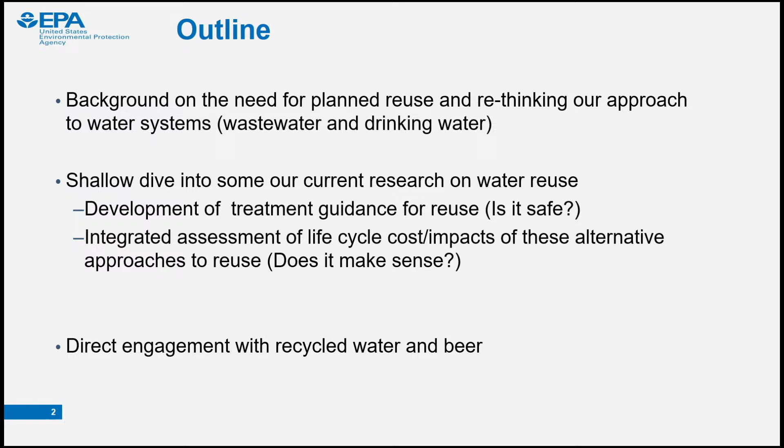And then the final thing we want to do is a little bit of direct engagement with you on the idea of how do you communicate about the safety of water. We can tell you the science behind it, but sometimes it's just best to drink the water that you produce to kind of verify it.

In this case, we're not going to ask you to drink recycled water. We're going to ask you, if you're interested, to drink beer that was brewed from recycled water. We have that from one of the companies doing this—they're based in San Francisco. So we'll have a little beer tasting at the end.

So I'm going to start off by justifying why we need to think about changing our water systems. One of the big drivers is our climate changing dramatically. The data here is from the fourth National Climate Assessment—a little dated, from 2017. But even back then, 6-7 years ago, the projections were that we're going to have chronic, long-duration droughts. And that's already occurring, particularly out west. We know that's a problem. That puts stress on our water systems because there's less clean water available to supply the system.

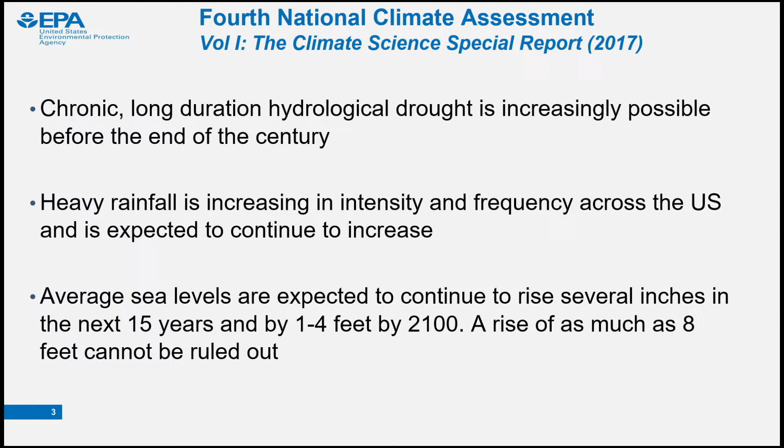The second thing is that not only are we having less water, we're also having more water in heavy rainfall events, including back east and throughout. That also puts stress on our water systems because part of our water systems includes wastewater collection and stormwater collection. When we have those big events, we have combined sewer overflows—we have them here in Cincinnati and other places. That stormwater overwhelms the collection system, and raw sewage is actually discharged to the environment. That's the combined sewer overflow, another stress on our water systems.

And that same climate report talked about water, and I know this is kind of wordy, but the problem with water is—I bring my wife so she can heckle me. Bring it on. She's not wrong.

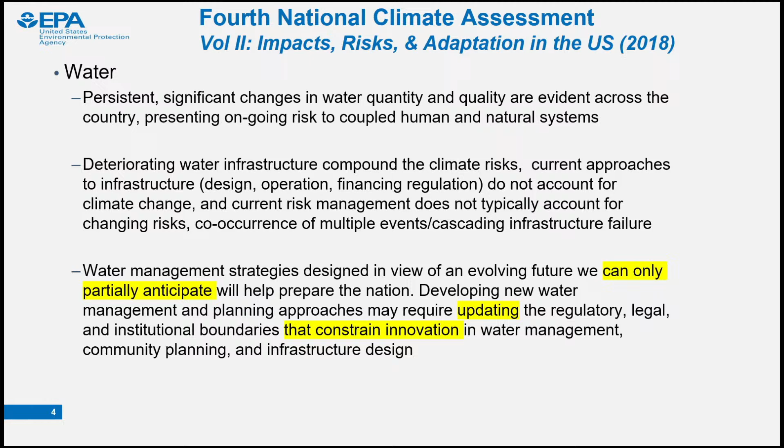I just leave you with this last slide on climate change, if climate change bothers some people. This is from the 2022 report, and basically if you read that report, the tone of it is like: we've been talking about this for about a decade now, telling you it's an issue, it's growing, and all the data suggests the warming is faster than we thought, the sea level rise is faster than the original models projected. This is an issue, and what this says is that we're already getting past the point of just living with it. We're going to have to adapt and try to mitigate this. It's really going to be a challenging next few decades simply because of that.

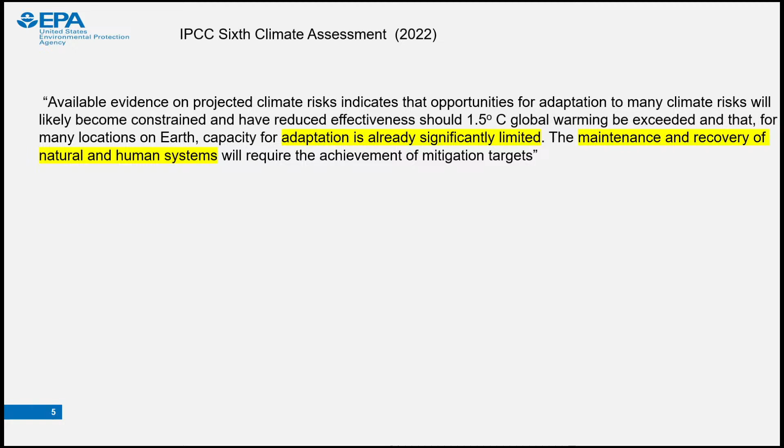So for those of you, I don't mean to be doom and gloom. When I talk to my kids, I try not to be doom and gloom. And some people don't like climate change, okay, but let's put this all aside. Assume that the future climate was going to be the same. There'd still be a strong argument that we need to change our water systems.

And that kind of gets into this question of why do we have the systems that we have now. Why do we have these large linear networks where we collect water from some source, bring it to a city, drink it, flush your toilet, and the waste goes somewhere, hopefully downstream of the drinking water plant, and that's our system. That was a great solution for the 19th century, 20th century. It's not so good anymore, and the reason for that is that there's too many of us. There is no downstream. Everybody is downstream at this point, right?

And we see that with some of the growing accumulation of common contaminants like PFAS, perfluorinated compounds, and microplastics. So this linear perception that we have a resource, we can extract it, use it, and dispose of it, and the environment will clean it up, really doesn't work because there's too many of us. There's too much stress on the water systems.

We know that doesn't work. But why do we have that system? Well, because first, we felt like we had enough — there was plenty of water, plenty of resources, and that worked. And it did. What it solved was public health issues with contamination from fecal sources and disease spread, right?

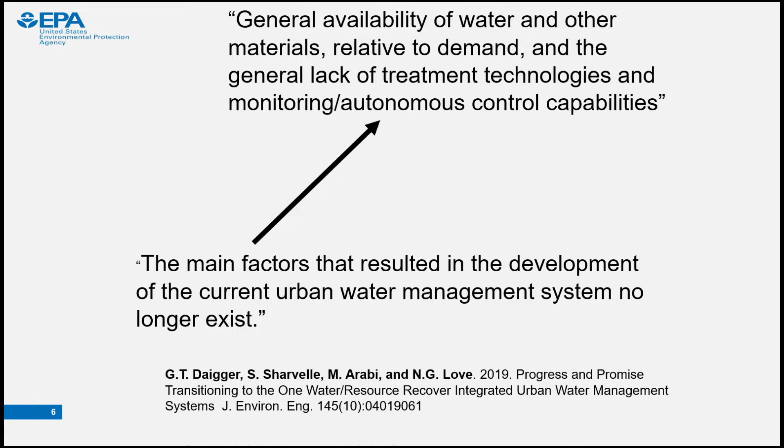So that was good, a great solution for that time, but not in the world we live in now. The good side of this, though, is that the other reason we have those systems is that we really couldn't do much more than that — we didn't understand the fundamentals of the biology going on. We have so much more advanced technology now in engineering and biological engineering, designing and monitoring systems, microelectronics, and other capabilities that let us do so much more. So the take-home message from this slide is that we need to do something different, and thank goodness we have the capability to do that.

So we can move forward into a new future. People talk about this transformation into a new system, where historically you've got a water system that's just producing water, meeting regulatory standards, plumbing up the planned city, and it's all very centralized. And I'm going to charge people based on the volume of water they use.

That's historical, but moving forward into the future, we're really starting to think about water as part of the circular economy, where we're using the water and the other resources in wastewater. We're not going to talk a lot about this, but there are nutrients we can use in the wastewater, there's energy in that wastewater, there's all kinds of things. This gets back to the roots — when you're in space, there is no waste, right? All the compounds you produce are no longer waste, they are resources. That's true for life on Earth too, and that's really the direction our water systems are moving.

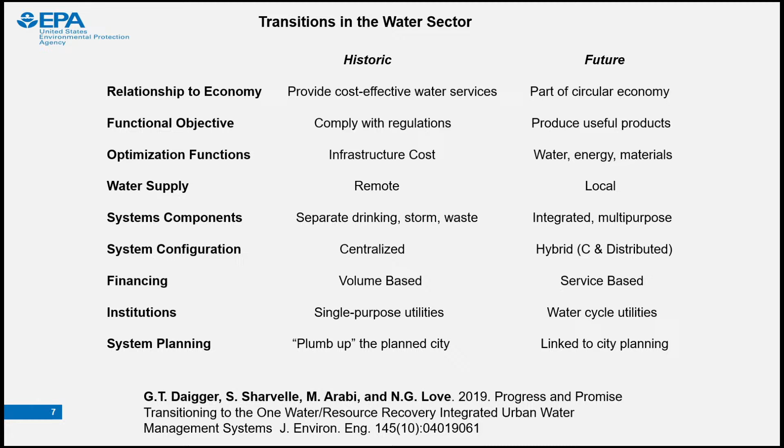That is occurring, particularly out west. In California, most major cities are moving in that direction. This is good, but I don't actually like this linear, monolithic path, as if it's the only way. We're just replacing one form of centralized water system with another. We're reusing the water, but still thinking in this linear approach—very monolithic, as if this is the only way to do it from a centralized perspective.

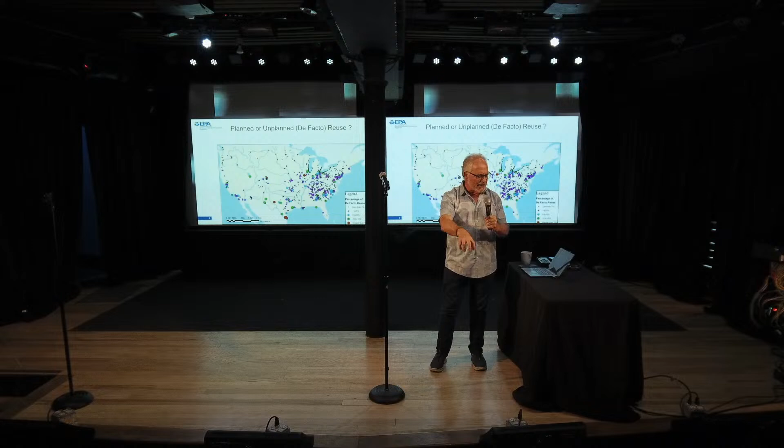One point I want to get across: when you think about water reuse, this is all planned reuse. You need to compare it to what we're doing now. What's the base case right now? The base case is we already do a lot of reuse—all water is reused. You all had 8th grade science class where you learned about the water cycle, and all water is recycled.

In this case, we know that a lot of wastewater ends up in drinking water. We just put it in an environmental buffer for a while, like the Ohio River, and it flows down, and then someone takes it out of the Ohio River, but it still contains lots of wastewater. So this map shows dots representing the percentage fraction of drinking water intake composed of wastewater discharges. The numbers range from 0 up to 15% or more of the total volume of drinking water you pull up being treated wastewater—but it's still wastewater.

So it's kind of de facto or unplanned reuse, and that is occurring—you can't see the map that clearly, but in Cincinnati we're at about 5 to 10% of our drinking water being wastewater discharge. Keep that in mind: we already are doing water reuse. Why don't we do it smartly? Why don't we do it in a planned way now that we have these additional tools?

One of these twisted paths in the evolutionary tree—one solution to water reuse is thinking about it in a more decentralized way. If you look at a building, there are two ways to view it from a water perspective. This gets back to the idea that there isn't waste, there are resources. You can think of all the water generated in a building as wastewater you have to deal with—a problem. Or you can flip it and call the problem your solution: those are all locally available water sources you could treat and reuse, reducing reliance on transporting drinking water to the site, particularly to flush your toilets. Why do we use potable water to flush toilets?

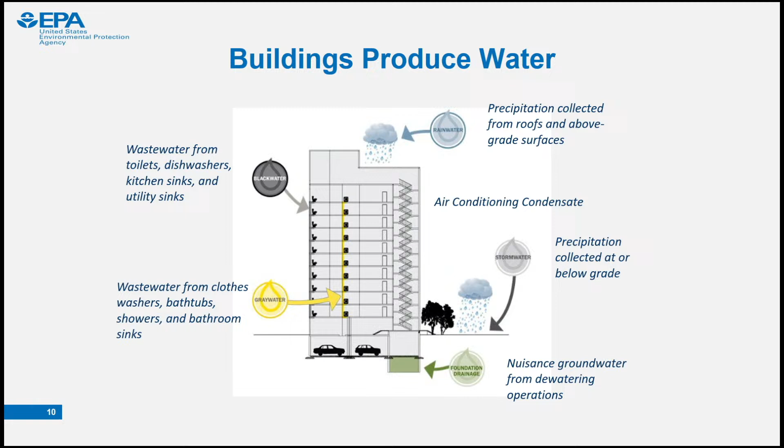But also rainfall that falls on the roof of the building that you can collect. Also rainfall that may fall on grade around the building. The reason we separate that is that storm water that hits the surface of the city environment is much more contaminated than what hits the roof of the building. But there's also things like AC condensate in the building, all the water that's condensed off the coils of the AC units - that's another source of water that can be used. So that's really what we're going to talk a lot about today.

We've really worked with communities around the country that are interested in pursuing this decentralized concept. And really getting at how well you have to treat that water, from various sources, for non-potable uses, and does it make sense? What are the energy trade-offs of trying to treat water locally versus just relying on the centralized supply?

And just so you know we're not talking about made-up stuff - I used to always talk about what was going on on Mars or the moon that hadn't happened yet. But this is really going on.

These are examples of buildings. On the left-hand side is the Solaire building in New York City. They've been collecting all the wastewater in the building, treating it in the basement with what's called membrane bioreactors and advanced disinfection, and recycling that water in the building for over two decades now. They use that water for cooling purposes and toilet flushing - not for potable use. They do it mainly to avoid sewer tax, because New York City has big problems with CSOs, combined sewer overflows. So that's their driver.

The building in the middle is from Portland, Oregon, not as water constrained as, say, California, but they introduced this recycling system so they could get LEED certification for the building. They actually designed a system that is part of the landscape, increasing the property values to have that kind of setting. Those little purple pots you see are part of the bioreactors - they put spotlights on them to make them look purple. So if you're really bougie, you can sit around and drink your cocktails in front of your purple bioreactor.

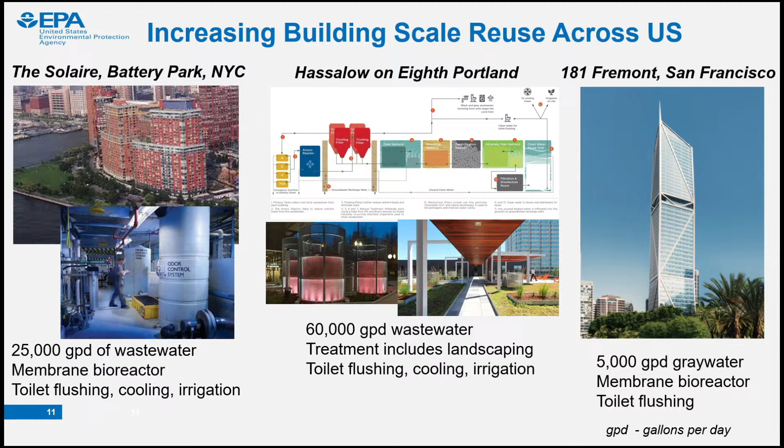And the one on the right is from San Francisco, where they have actually mandated that any new building over 250,000 square feet needs to incorporate dual plumbing for this kind of on-site reuse. Again, these are high-end buildings charged extra premium, and they've been recycling, in this case, gray water, as opposed to some recycling the combined wastewater. So it is occurring, and that's who the group is working with.

This is kind of the research plan that we developed - Mike and Sissy and others have been working on this over the last 8 years or so in our EPA labs, to look at a few questions. We're talking about taking these various sources and treating them for non-potable uses at different scales, ranging from maybe a single home to buildings or districts of buildings. The three questions we wanted to look at: first, how do you define acceptable treatment?

That's what Mike's going to talk about - that's the safe part. The second question is, once you define safe, how do you know the systems continue operating safely? We're not going to talk about that too much tonight, but that gets into how you monitor it, how you ensure continued operation as designed. The third question is this broader context of, does it make sense? Are you having impacts like increased CO2 production, increased cumulative energy use because of what you're doing locally?

So one way to rephrase that, we often talk about that first box.

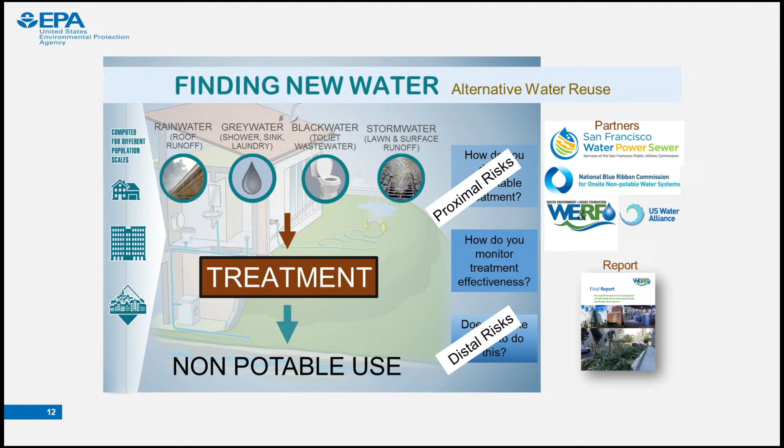What Mike's going to talk about is proximal risk - the near field risk of actually consuming that water - whereas the broader question of whether this makes sense is kind of a distal risk. What problems am I causing away from the people drinking the water, but having an impact more locally or regionally because I'm using more energy and it's just not trading well. So that's what Mike is going to talk about. I'm going to turn it over to Mike now.

All right, thanks, Jay. Hopefully everyone's feeling good about water reuse, and now we can jump into some of the more technical stuff. I'll try to make this understandable, but there are going to be some dense slides coming up, so just give everybody fair warning. Make sure you have a drink.

So the central question here is, how do we define acceptable treatment for these systems? By definition, we're talking about alternative water sources, so how do we understand what the water quality is of those sources, and how do we characterize these different types of water? We mentioned how we talk about rainwater versus gray water versus wastewater, and how do we first characterize the quality of these alternative water sources?

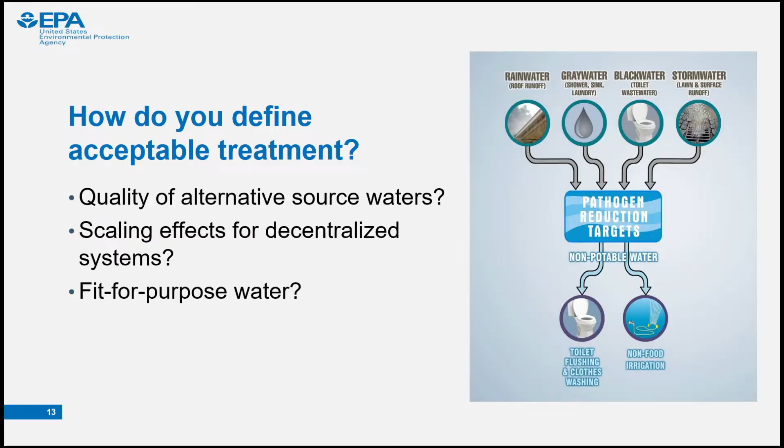Does the scaling effect matter? When we talk about building scale systems, we know a lot about municipal wastewater from doing this linear approach for hundreds of years, but when we go down to a building scale, does that change the water quality? You're going to hear a lot about pathogens from me - these infections are sporadic, so not everyone is always sick, but if you go to a citywide population, there's probably somebody who's sick at any given time, and those rates tend to stabilize as you get to bigger populations.

But when you're in a small building, that's no longer the case. Maybe no one is sick and there's never any pathogen in the building until someone comes in, and now you have maybe 1 of 5 people who's sick and shedding pathogens, so there's not a lot of dilution that occurs there. You get this variability in concentrations where it's often very low, but then you see these high peaks. So how do we account for that in our risk assessment models?

And then finally, this question of fit for purpose water. Jay mentioned that it doesn't really make sense to use potable water to flush toilets, and if that's true, which I think we'd agree at face value makes sense, how do you actually characterize that when you're trying to set science-based treatment targets?

So our approach here is to use risk assessment to really look at what the actual risks are that are associated with these systems. These attempt to specify a set target level of risk, and then we basically back the level of treatment out from what our de facto condition is to what treatment will get us down to the level that we need. So the first thing you have to do is pick a risk target.

There's a couple different targets you can choose, and different endpoints that you can base those on. Our default is based on infections - there's this number, 1 in 10,000 infections per person per year. So 1 out of 10,000 people who use the system will get a pathogen infection from using it. That's typically what we've accepted for drinking water in this country.

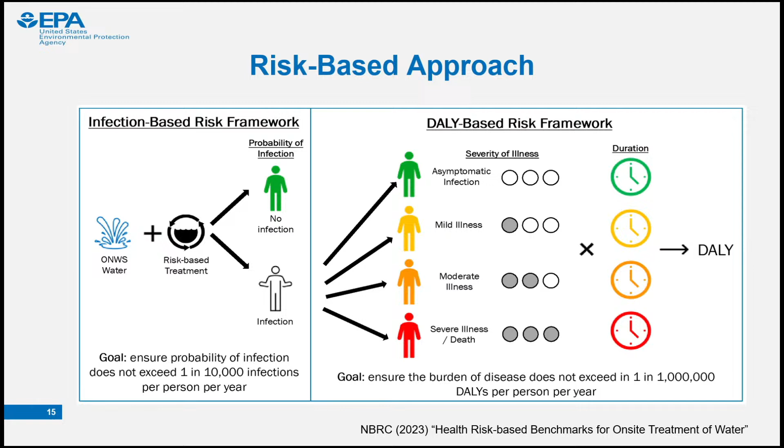This is really consistent, I think, with our modern reasoning with respect to COVID. When COVID first started, we controlled for infections, and everybody cared about infections—making sure asymptomatic infections were still concerning. But as we've progressed, we no longer care about infections; we really care about managing for illnesses and impact. We say, get vaccinated, so if and when you do get infected, you don't end up having severe outcomes. That really aligns with this DALY-based framework we're talking about.

Then you have to figure out the density of pathogens—what is the actual load of these contaminants in those water sources? That gets back to the source characterization question, trying to model the concentrations of all these different pathogens in all these different source waters, and a lot of work goes into that. Then, once you're actually exposed to the pathogens, what happens?

Particularly as you move to these illness and DALY-based frameworks, what is the likelihood of getting infected, then becoming ill, and then having missed work or some more severe outcome? All those have probabilities, and there are models used to show how an exposure gets to an effect, taking you from the pathogens you have to the actual outcome you experience.

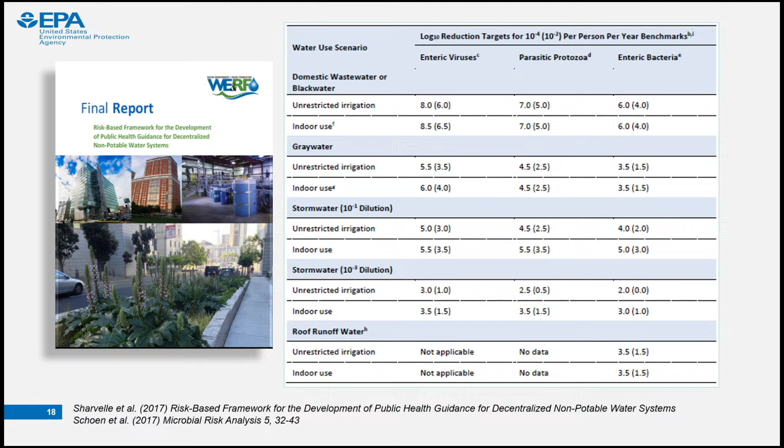We weren't using DALYs at the time, but in our recent work, this table has been expanded to also include DALY-based numbers, which I think is a major advancement.

This approach and guidance document have already been adopted into a number of state and local regulations. California and Colorado are really leaders in this. Washington State has forthcoming regulations based on this approach, and other places are considering it as well.

Importantly, we've also been working with the plumbing code groups. If you're going to build these systems, someone actually has to install them, and they need a plumber who can hook up this system in your bathroom. There's a lot of subtlety in terms of what they can and can't do based on the code. So we've been working with these organizations, which as you can imagine are quite rigid, to try to adapt these new approaches into their existing plumbing codes.

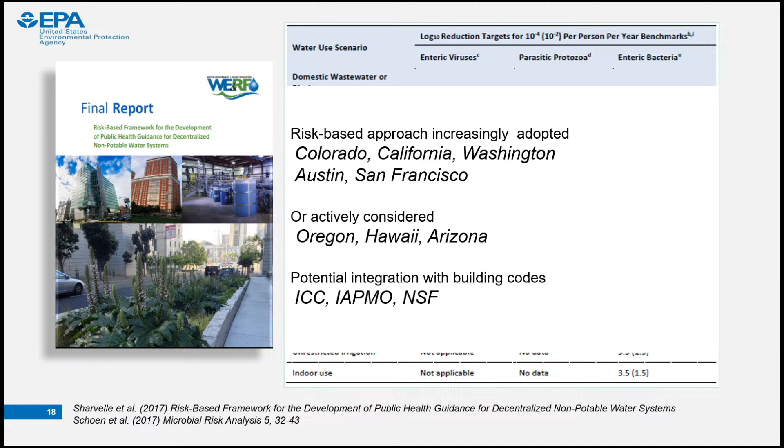So finally, this is my last slide. This is just, how do you actually do this?

What you have to do is pick your treatment train. You take those LRTs from that table, the total log reduction target, and then stitch together different treatment processes that together can achieve that log reduction target. Every treatment process has a log reduction value associated with it, and those numbers have to add up.

Here, the treatment train we're showing is a membrane bioreactor, which is a compact biological treatment that works really well for systems in basements, combined with UV disinfection and chlorination. For each one of those, there's credits received for viruses, protozoa, and bacteria, and you have to make sure the total sum of those numbers meets or exceeds your log reduction target.

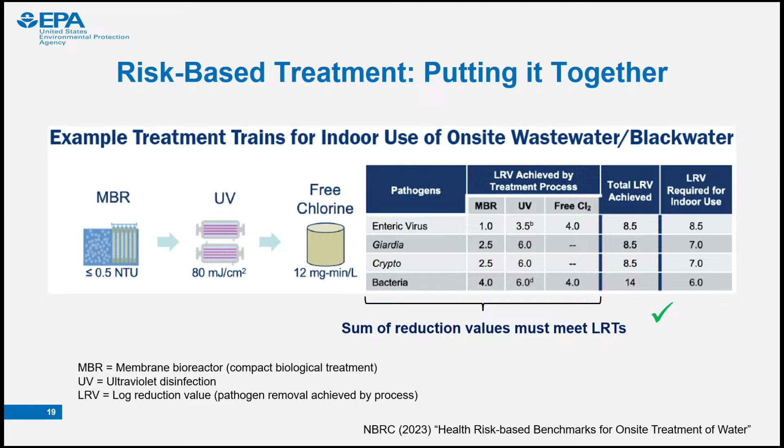In this case, you'll see that it does, so this is a valid treatment train for achieving your risk target. That's really how you get to these risk-based treatment systems that are going to be safe because they're designed that way. With that, I'll transition over to Sissy to talk about whether or not this makes sense.

So I'm a system scientist, so I'm interested in the issues from a system perspective. In the water reuse, on-site water reuse work, there's a lot to think about, like Mike and Jay mentioned. It's not just water, there's also energy used to get the water to the target. So what's the broader impact, say, greenhouse gas emissions? What's the potential burden shift? We have some hidden trade-offs, so we need to look into that. We use some system tools, assessment tools, to do that.

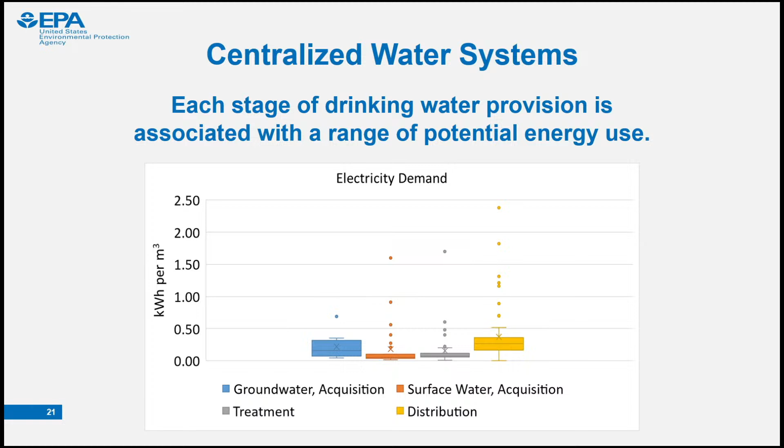Before we do that, I just want to mention comparing the on-site decentralized system. The reason we do that is because the centralized system, the larger system, uses a lot of energy. We're taking water from groundwater, from surface water, that takes energy. Acquisition, moving the water to your treatment plant, treating that water, takes a lot of energy. And then after you treat the water, you distribute it, which takes a lot of energy to move.

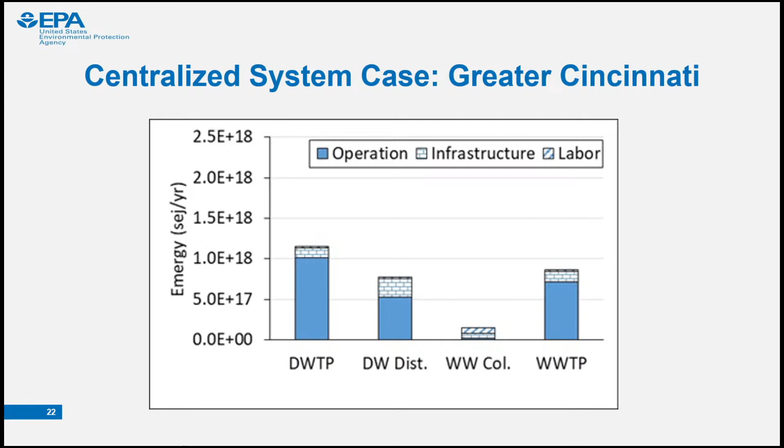For example, the treatment train using the membrane system, advanced disinfection system, and then reuse the water. So we evaluate this process. Not only that, the life cycle approach takes into account the indirect input to the system. For example, the chemicals used, the energy used, what resources went into producing the energy or the chemical - all this impact gets captured. In the end, say you need to dispose of your system, that disposal cost is also taken into account.

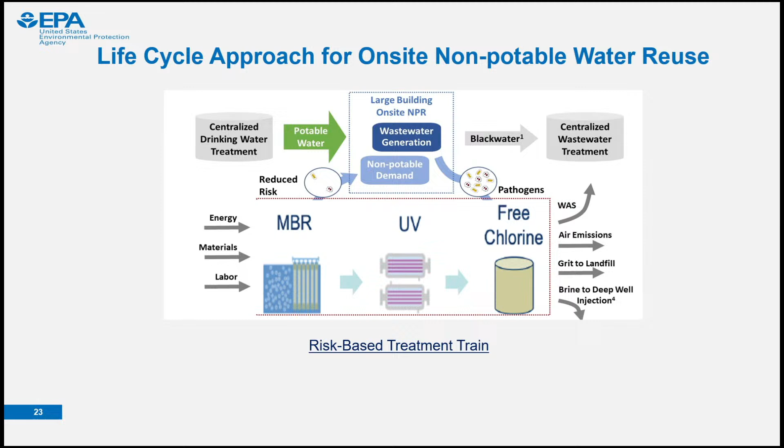So, for example, we studied this on-site water reuse and developed a tool to understand, from front to end, what the impact is. And then we use that tool to evaluate the whole country, nationwide, looking at different source water, alternative source water - for example, rainwater, AC condensate, gray water, or black water - to see which one is a better alternative.

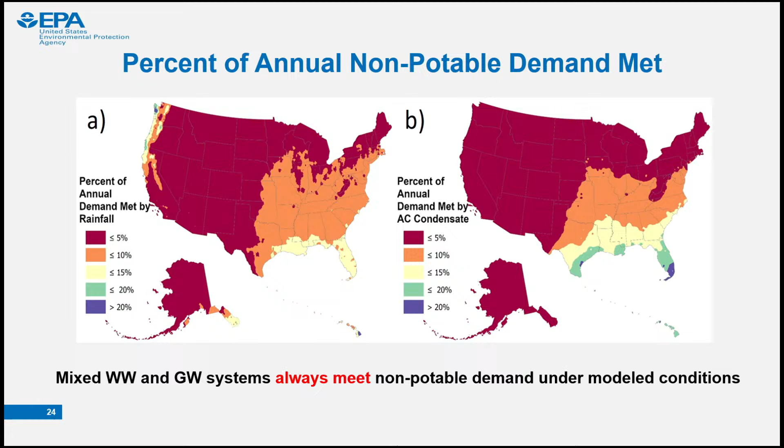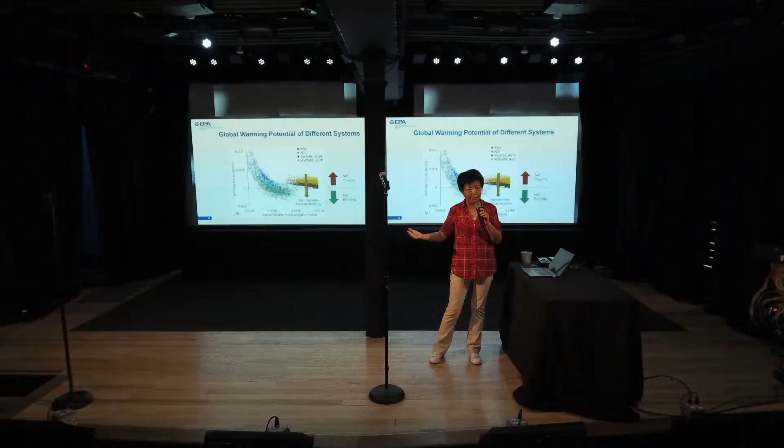Thinking of capturing rainwater - right now a lot of people talk about stormwater capture potential. There's tons of storm coming down, and yes, you can capture that water, especially with climate change where precipitation is sometimes very intense. You can have a couple hours with tons of rain, but you can't capture it all unless you have huge cisterns to capture that.

So the blue dots here represent rainwater, the green one is AC condensate. On the x-axis is the volume of the system. In this case, when the system is very small, you still need to build a retaining cistern to capture the rainwater or AC condensate, and there's a lot of material and infrastructure invested to build that - but the amount of rain may not happen every month or every week.

So you still have the infrastructure built in, but as the system becomes larger, you can see that's where the excess gets on the right side - the rainwater and AC condensate could go below that line. The y-axis is greenhouse gas emissions, meaning a lot of the energy or material built has greenhouse gas emissions along its supply chain - for example, electricity from a power plant generates emissions along the way. So this captures the total cumulative impact.

But the system has an economy of scale - when it becomes larger, you can see the rainwater and AC condensate could become negative greenhouse, meaning it could offset a lot of the greenhouse gas emissions you'd otherwise use for drinking water.

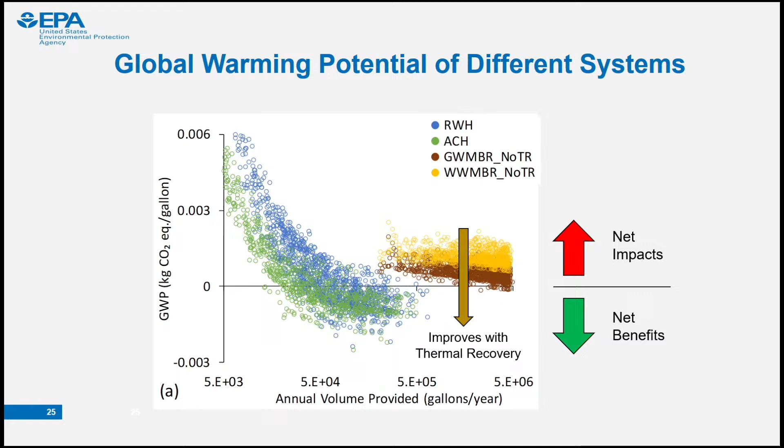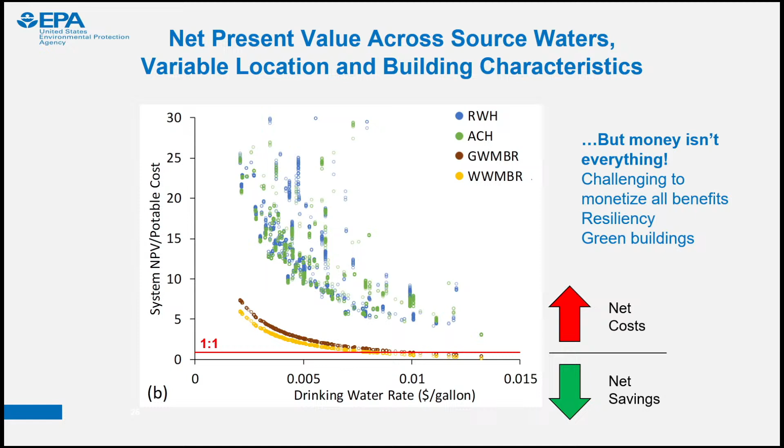So this is the cost picture - people are interested in whether this makes sense and is cost effective. You can see the red line at 1-to-1 means the system's net present value is equivalent to the potable water price from the central system. The curve shows that as it gets larger, the price gets closer to, or maybe even less than, the centralized system - especially when you account for energy recovery, the whole system can perform much better than the centralized system's water price.

Especially now, with water prices getting more and more expensive across the country, that red line is going to move up, so those decentralized water reuse systems become more and more appealing. That's why a lot of communities are investing in these solutions.

So Jay, want to share the closing thoughts? Thanks, Sissy.

So we didn't show too much data, but just a little bit. Thanks to Sissy and Mike, you guys did a great job of trying to describe that data simply. So the take-home message is...

This treatment guidance that Mike talked about has been established, so we now have these standards. The states and localities doing this have the information. Mike was being very modest - the work he did is really significant. We were at a meeting two weeks ago with the community of people doing this work, and what they talk about right now is that we are at an inflection point. We're at this point of massive rise in utilization of these reuse systems because the regulatory uncertainty has been cleared, really because of the work Mike did. So thank you, Mike.

At the same time, there are people that want to do this for all the reasons I mentioned - because there's water stress in San Francisco, they're going to require it. They want to avoid CSO and sewer tax, so they'll do it in New York City. They may want to develop green buildings, LEED certified buildings, they'll do it for that purpose. So there are lots of drivers, but the work Sissy talked about shows it does make sense at some fundamental level - these are efficient and effective ways to reuse water.